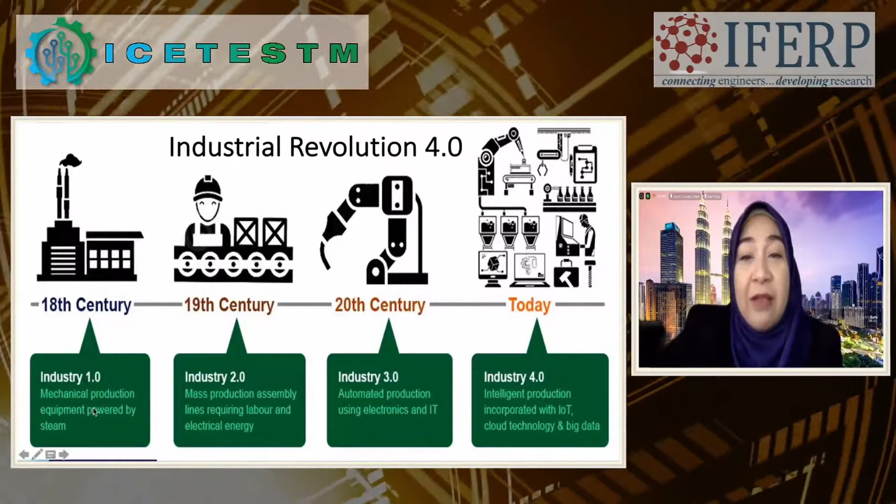We have artificial intelligence, augmented reality, additive manufacturing, simulation, cloud computing, autonomous robots, system integration, and many more. So the use of interconnected digital and associated technology in industrial production enables transformation in terms of people, process, and technology to enhance the efficiency, productivity, and revenue of any production. So this is what IR 4.0 is all about.

So if you talk about robots, I can show you a simple general classification of robot, where we can have robotic devices as industrial robot or non-industrial robot, which is actually very famous now. It's a machine that actually resembles a human being and is able to replicate certain motion, movement, and also function automatically. So this is what a robot is in general.

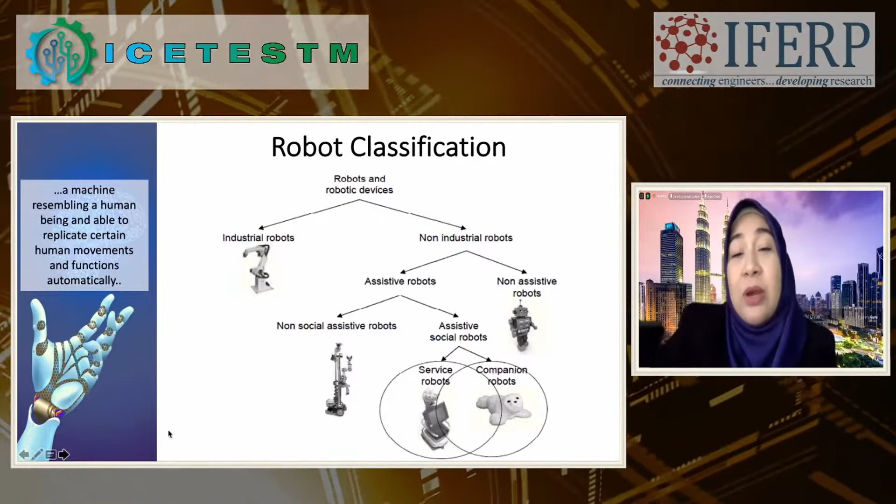So if I show you the classification that we can have at the moment, robot can have, in terms of industry, uses for welding, painting, ironing, and assembly. So in a greater scale, a bigger scale, where high endurance, speed, and precision is required, where human may be lacking in it.

For service robot, you have seen domestic use. We have, for example, lawn mowing. You have a vacuum cleaner robot. You have robotics being used in your equipment for daily activities.

Professional use also, we have a lot of robotics actually being utilized, especially during this COVID-19. We actually deploy robots to take care of a lot of things, for example, for the sanitization in areas where it is very dangerous for human to go, because of the spreading of virus and all.

So we have it also for defense. We have robot professional use in terms of surveillance. So we can actually utilize this robot to help our daily activity, where it will do a lot of precision work and also require endurance.

Okay, so I'm going to introduce another classification, which is what we call educational robot. This is also very important because currently our children are being educated, even at secondary or primary school, on how to utilize or use robots, to make them ready for the future, because the future is robotic. You cannot deny the usage of robots. So we want to educate our children in the early years, so that they are very knowledgeable on it.

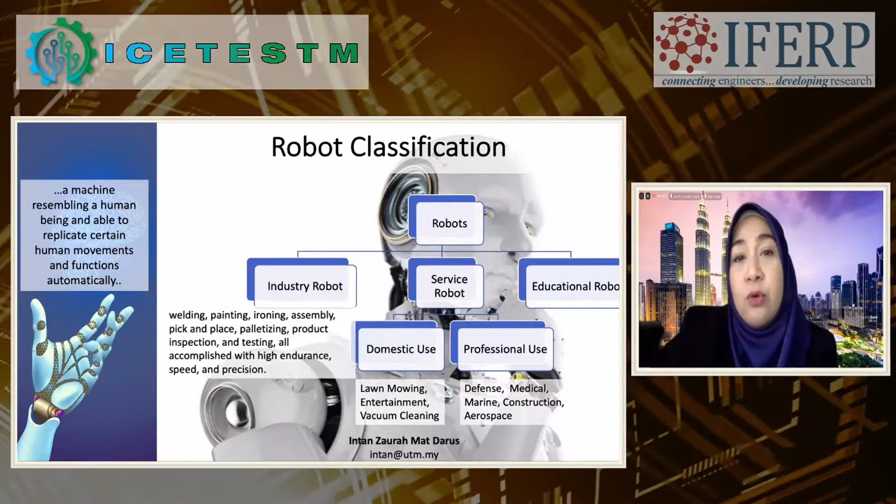Okay, so we do have also educational robots for the industry at the moment. If you talk about artificial intelligence, we have actually used artificial intelligence in our daily activities. Our artificial intelligence algorithms enable the robot, it's like a brain to your robot, to enable or resemble human motions and the ability to replicate human functionality. So it's like the brain of your robot.

Okay, so if I can simply characterize artificial intelligence in terms of machine learning, expert computational intelligence, and distributed artificial intelligence, and many more. So this is the basic distribution or classification of artificial intelligence.

So if I go into greater detail, in the research field, when we talk about artificial intelligence, there are a lot of things like, for example, machine learning, computer vision, planning and guidance, and robotic structures being used. Artificial intelligence is being used in this field.

We also have research techniques utilizing artificial intelligence, well known as AI, for example artificial neural networks, evolutionary algorithms, evolutionary computing, expert systems, fuzzy logic, genetic algorithm, which is actually a very old algorithm developed, and many more. Okay, so this is a part of artificial intelligence.

So if I talk about the roadmap or the emergence of artificial intelligence, it started back in the 1950s with the birth of artificial intelligence, many years ago, like maybe 70 years ago. This is the early stage where artificial intelligence became the emerging field. Later on it was actually utilized, as I mentioned, as the brain of the robot, the brain of automation.

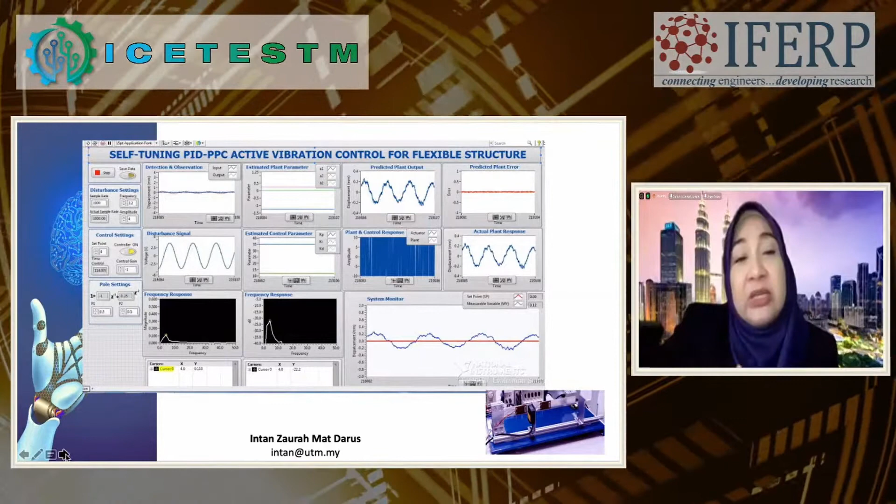Why do you need it to be self-tuned? Because a robotic structure can experience a lot of disturbance, and the performance of the controller will reduce if the transfer function or parameters of the system change. In terms of robotic structure, the parameters always change. Why? Because the robot is actually holding things, isn't it? So the mass of your robot arm can always change. When it changes, you want your controller to be updated so that the performance is always optimum.

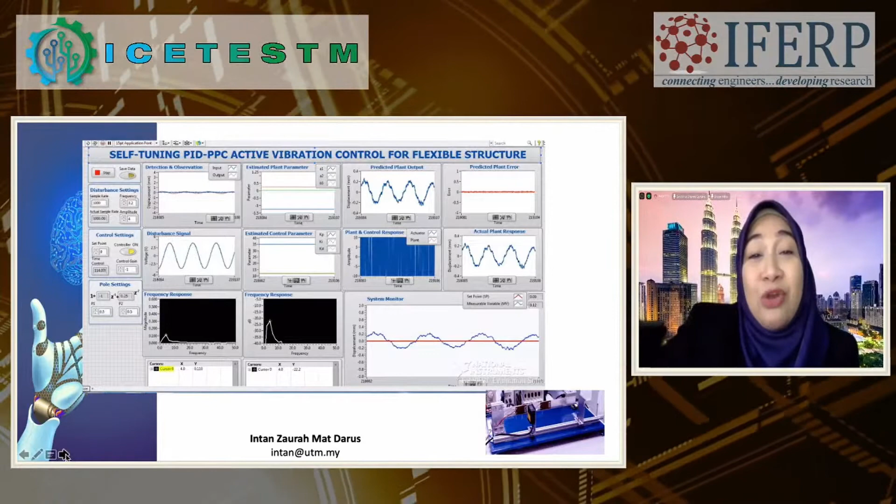So this is what we did for vibration control on a flexible structure. We later talk about flexible beam as well, and we've done it with plate. So with beam, why not with plate? Because plate can be used — you need to have this structure utilized in many applications, for example in robots, for medical purposes.

If you look at this horizontal plate, when you have a medical surgeon conducting surgery for a very long time, what happens is that they start to shake, isn't it? We want to reduce this, because surgeons sometimes do their surgery for a very long time, maybe more than 2 hours. They are also human, so they will start to shake. If we can have a sort of arm rest for them, this arm rest can actually cancel the vibration coming from the surgeon. This is just an example.

There are many applications, robotic structures that require you to cancel the vibrations on the robot structure that look like a flexible plate, like we have here. So we've designed a controller utilizing artificial intelligence to cancel the vibration, and it is very good because the vibration can be cancelled very fast.

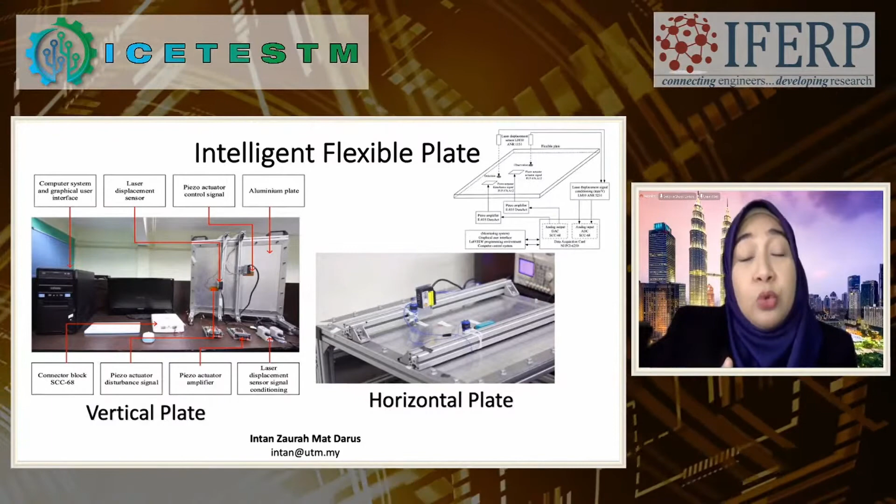There are many applications for robotic manipulators. As I mentioned, medical purposes — there are service robots now actually serving people in restaurants. You have robotic structures being used in aerospace, in agriculture, in plant development, and many applications that are very hostile for humans to go and do this kind of work. So robots are being employed.

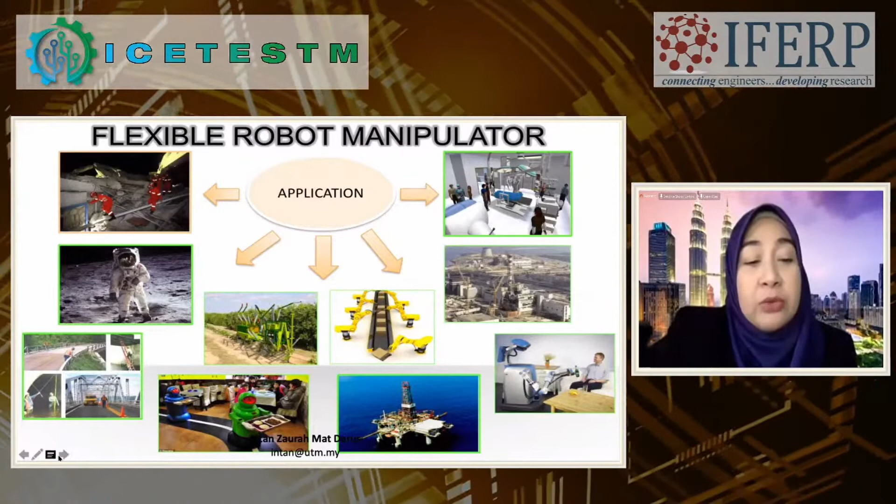When we talk about robotic manipulators, maybe if you talk about a robotic arm, it is actually very complex, isn't it? You look at it as if it's a very complex system. So we start with a very simple structure. Again, I introduce a flexible robot because, as I mentioned, a flexible robot is very light, so it can be used in many applications.

Okay, so we developed a simple robotic manipulator like this. The purpose is not really to have it do a lot of work. It's just to make it move, mimicking the robotic arm, and utilizing flexible structure because we want it to vibrate. So when it vibrates, our responsibility is to do the vibration control to cancel the vibration.

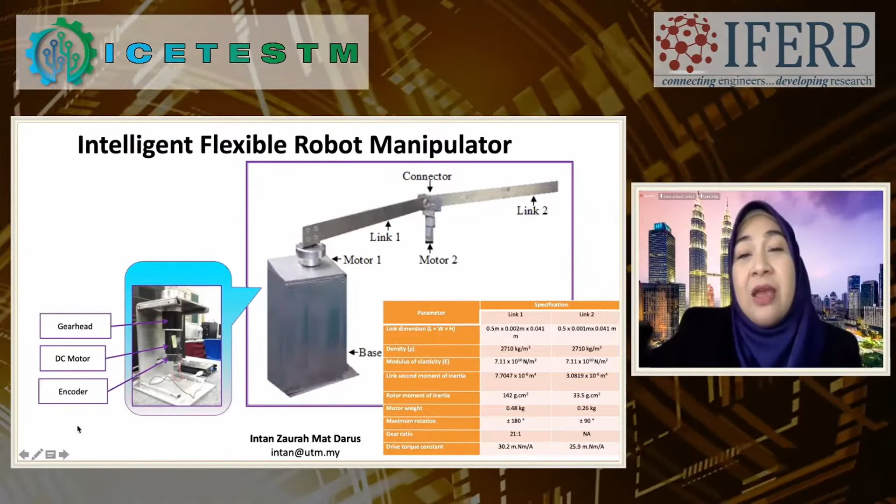So this is the kind of intelligent robotic manipulator that we have designed. The purpose is not for us to develop the manipulator, but actually to develop a very good controller so that it can control the very strong vibration experienced by this robotic manipulator, so that the robot can still function at the top performance of its functions.

So when we talk about artificial intelligence algorithms for system identification and control, these are the kinds of algorithms we have utilized: genetic algorithms, fuzzy logic, neural network. We have done differential evolution, particle swarm optimization, artificial bee colony, fireflies, and many more new algorithms that have started to emerge for us to use for system identification and also for the controller. So these are some of the algorithms that we have used for the structure I mentioned.

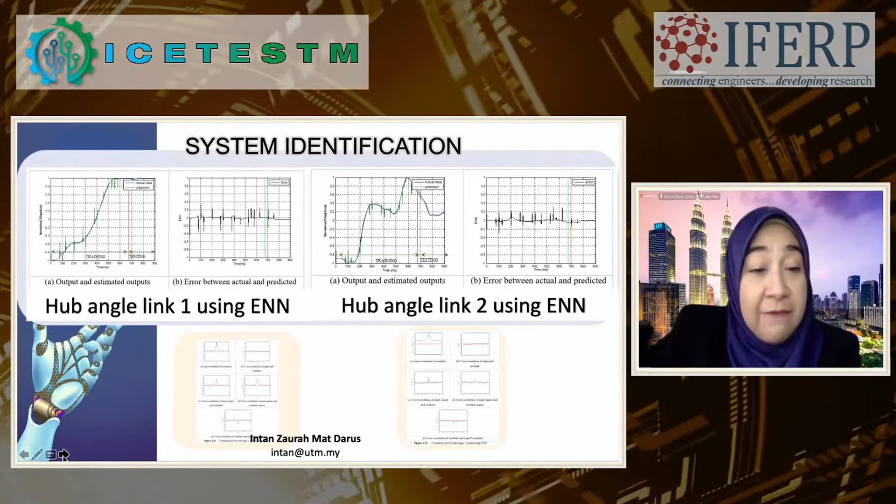This is some of the results I can show you for the manipulator utilizing neural networks as an example. You can see the neurocontroller used to do the system identification, and also later on we utilize it for control behavior as well. You can see the performance is identified very accurately with a very minimum error, so that the model can be very accurate.

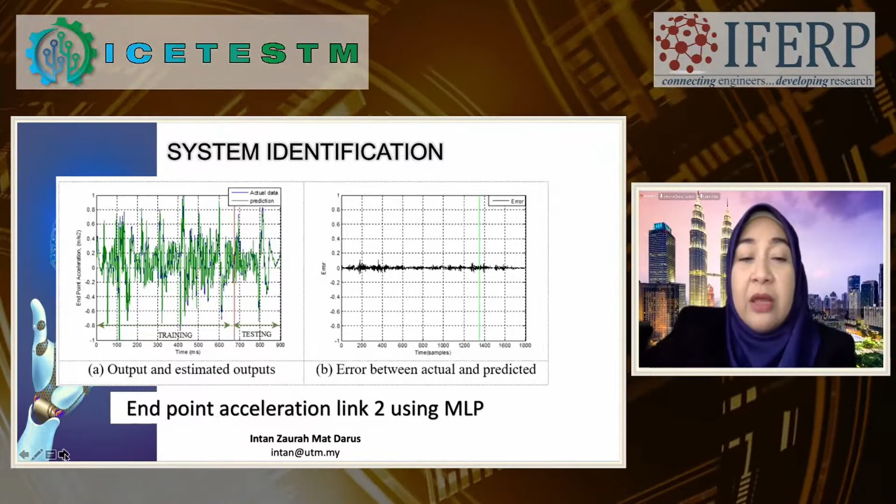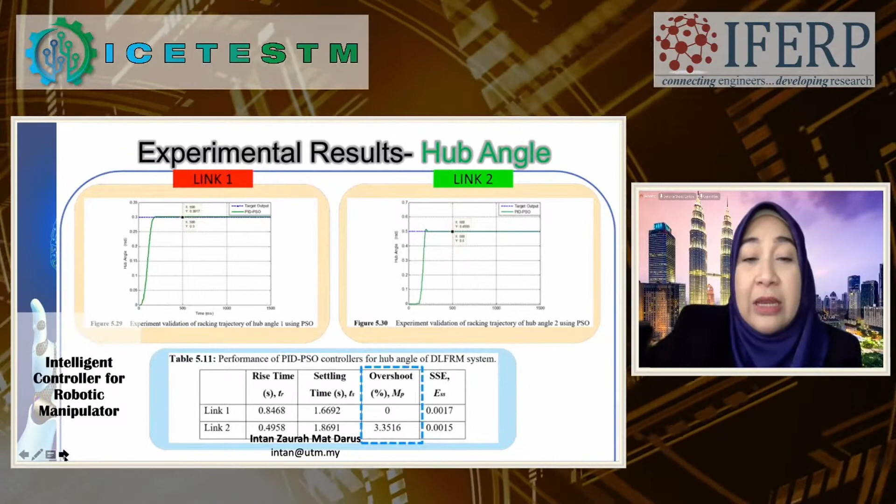So this is an example of the result on the hub angle of the two links - the first link of my robotic arm, and then the second link of the robotic arm, conducting a very simple motion just to move from 0 to 0.3 radian, for example. You can see that it is performing very well and very fast.

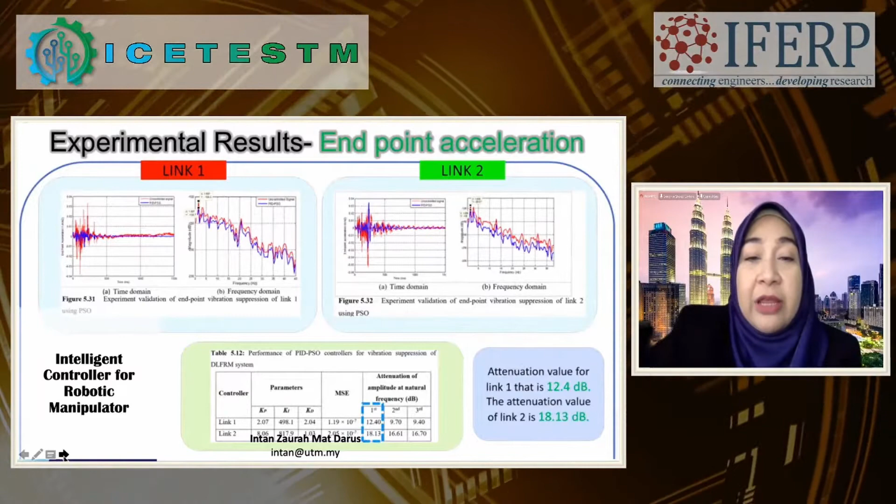So what is the current and next direction of the research? As everybody has experienced, 2020 is a very, very challenging year for all of us in education, isn't it? We are experiencing a pandemic that is not allowing most of our students to come to school or come to the university to conduct their usual classes. So what we have is actually conducting education or our classes through online sessions like what we have here.

For lecture, normal lecture is quite simple, quite straightforward - we can just use WebEx, Zoom, or Google Meet, and we can meet our students all the time, anywhere, anytime. But how about laboratory work? For example, for mechanical engineering students in my school, we have this difficulty because students need to utilize the experimental equipment that is actually in the lab, isn't it? The university is closed because they are not allowed to enter due to the pandemic.

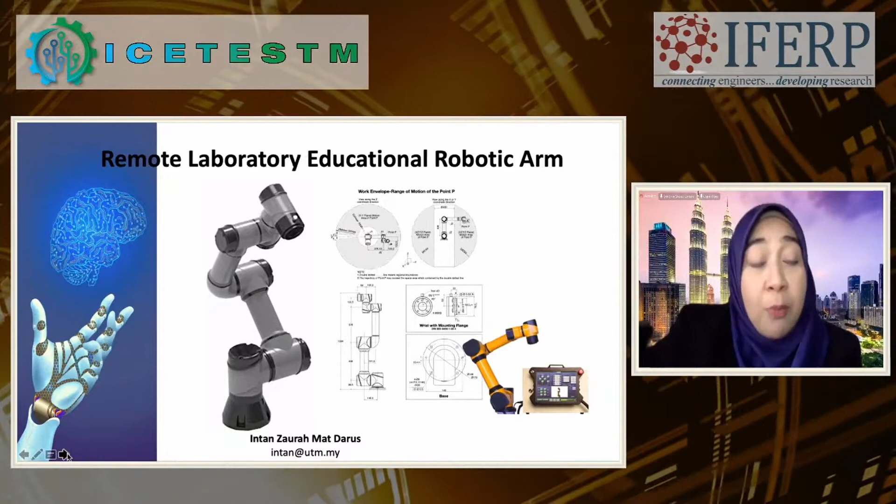So what happened is that we came up with a research project - we quickly developed a remote laboratory educational robotic arm where our students can access the behavior of the robotic arm from wherever they are. So we are developing an educational robotic arm with an intelligent controller, and it is remotely accessed by people from all over the world. This is actually one of the current research projects we are doing - it is still under research.

So the purpose is for anybody who would like to use the robotic structure - they can design their controller from anywhere, and then access our robotic arm to test their controller, and they can use their data to analyze the performance of the controller.

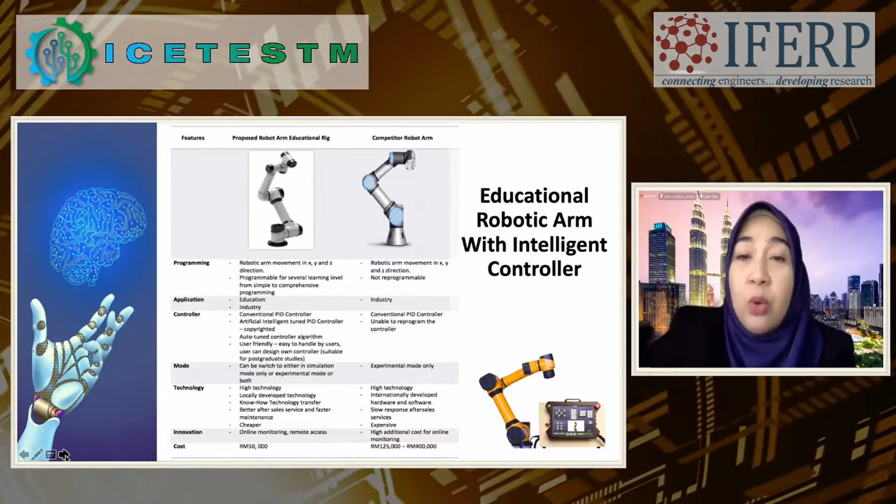So without even having to buy the robotic arm - as you know, robotic arms can be very expensive - this is actually a medium where we can let our system be rented, for example, for people from all over the world to use from anywhere they are, utilizing remote monitoring and remote programming. So they can conduct their program using MATLAB or LabVIEW, or whatever, from anywhere they are, and then implement it on our robotic arm in our lab. This is one of the current research that we are doing.

We also have intelligent automated robotic arm for food industry. During this COVID-19, people are very concerned about their health, hygiene, and food preparation. With this intelligent robotic structure, we can utilize the robotic arm to automatically bake a cake - the most difficult being what we call kek lapis Sarawak in Malaysia, layered layer by layer, with about 30 layers. I think in Indonesia they have this cake, kek lapis, kek Betawi. So our robotic arm is able to do these layers after layers of cake with repetitive work in a very hygienic situation, which is very important during this pandemic - and not only during pandemic, but at any time, since food preparation needs to be very hygienic. This is one of the recent research we have conducted.

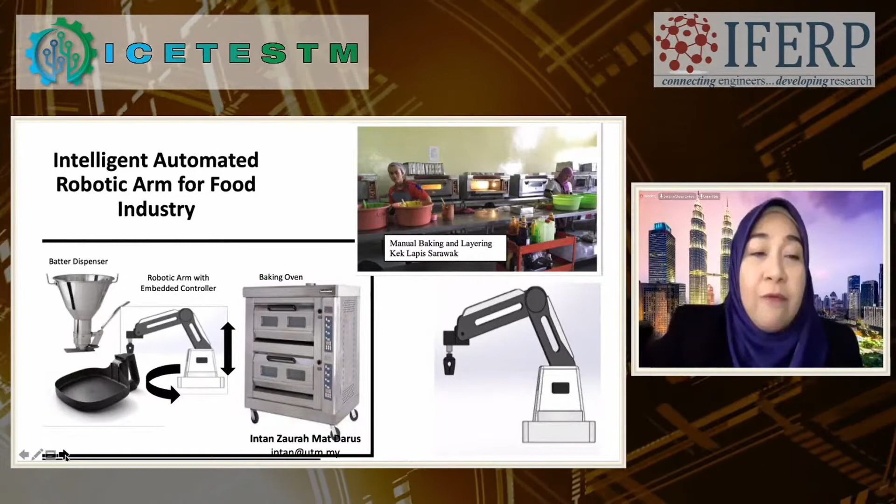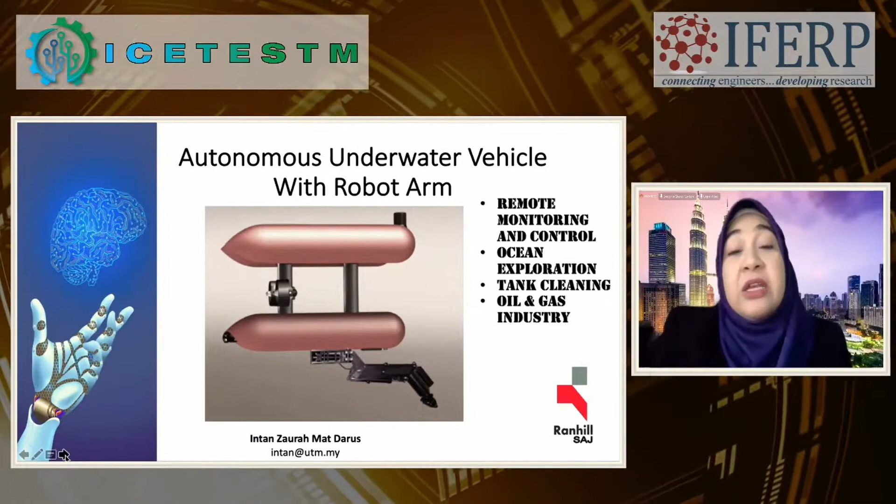We also have an autonomous underwater vehicle that we utilize for remote monitoring and control to do ocean exploration, and also for tank cleaning. Our close collaborator, Ranhill, is one of the manufacturers of water treatment in Malaysia, so we are working together with them to provide services to monitor the performance of their underwater systems and water quality. This is one of our consultations with industry, utilizing robotic structures and artificial intelligence algorithms for ocean exploration as well.

The most recent system we are developing is what we call the wireless water quality remote monitoring system. This is also a service for water treatment plants. For example, around here, there's a water treatment plant where they need to monitor water quality so that when the water intake comes to the plant, the quality is good. If it's contaminated with ammonia, for example, water taken from the river with ammonia can be detected at the water plant, but we want to detect it earlier. So we need to put a lot of sensors in the water before it reaches the plant.

We want this because if there's something wrong - we check the ammonia level, pH level, and turbidity - we can do some controlling. For example, we can stop the water from coming in, or we can open the dam so the water is flushed and the ammonia level is reduced. This is a very important thing.